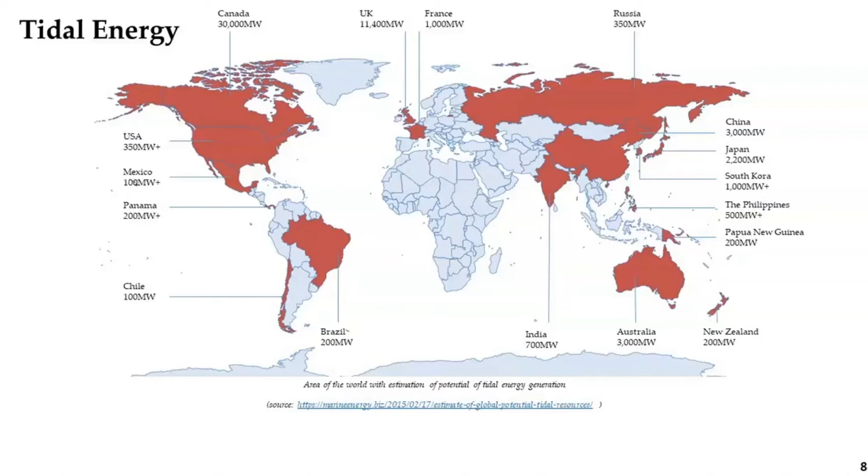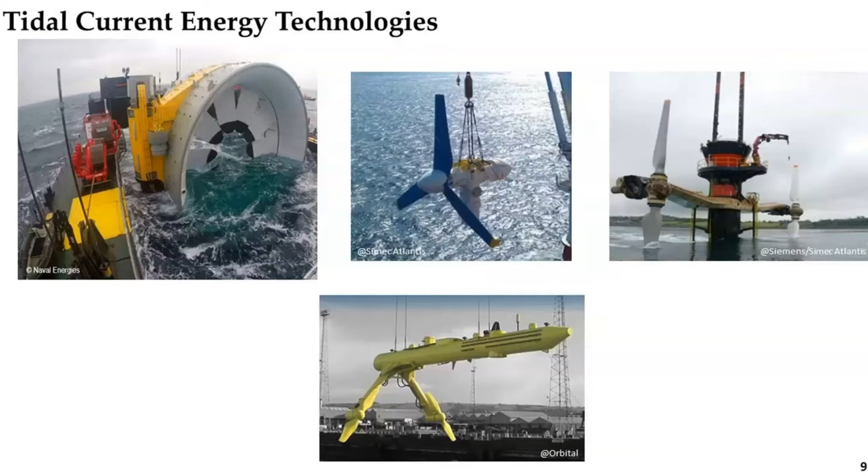There are several projects which are already grid connected with seabed mounted turbines, all in Europe. I'm going to present three projects. The first one is the MeyGen tidal project by the company SIMEC Atlantis, and it's happening in Scotland. They use a turbine with an 18 metre diameter rotor. Each turbine is located on an individual foundation weighing about 200 tons, and also with six ballast blocks with 200 tons as well to provide horizontal stability. In this area, the current speed is about 4.4 meters per second.

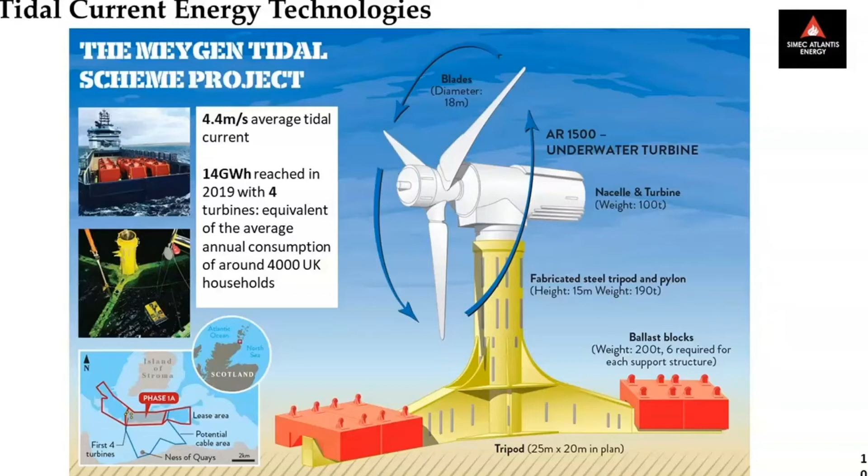And last year, with only four turbines, they reached 14 gigawatt hours, which is the equivalent of the average annual consumption of around 4,000 UK households. And this year, to date, they reached 28 gigawatt hours, and it's just the first phase with four turbines. In the future, they hope to deploy 250 turbines in the ocean that could power about 175,000 homes in the UK. And the latest news for this company is they have also installed one of their turbines in China just in April this year.

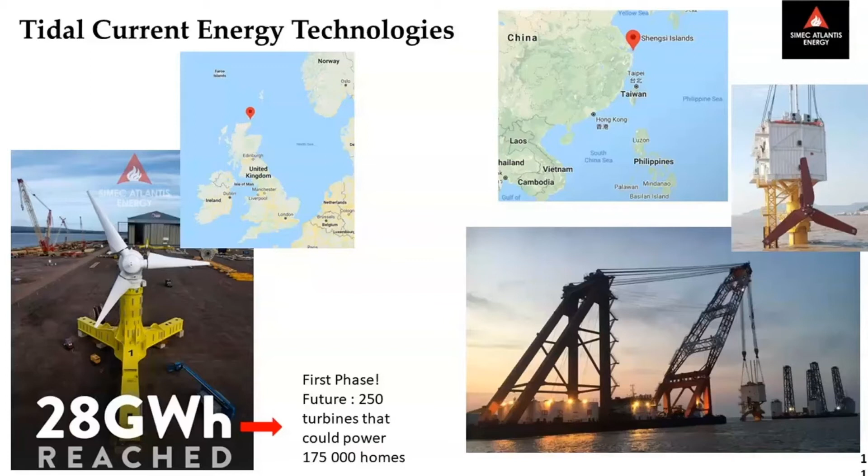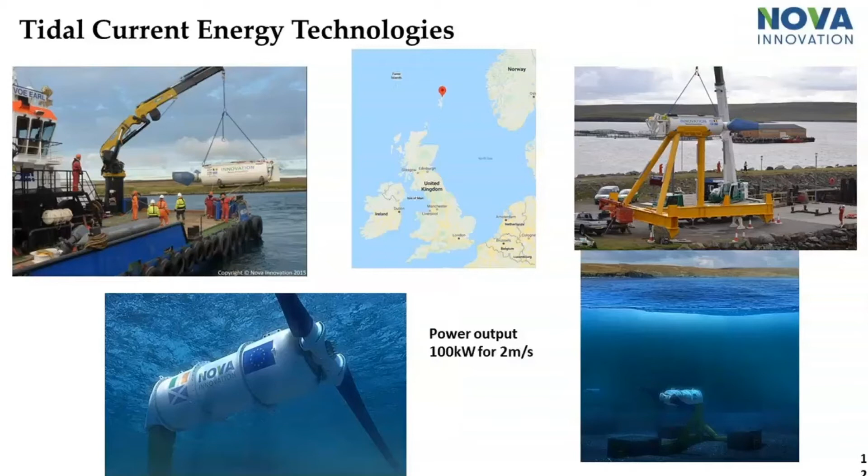The second company is Nova Innovation with a smaller turbine, and the project is happening in the UK too, in the Shetlands. It's a smaller turbine of 8.5 meters diameter with a rated capacity of 100 kilowatts for a current speed of 2 meters per second. The last project is happening in France with the company Sabella, located near Ushant Island, and they deployed a turbine with 10 meters diameter and a maximum power output of 1 megawatt for a current speed of 4 meters per second.

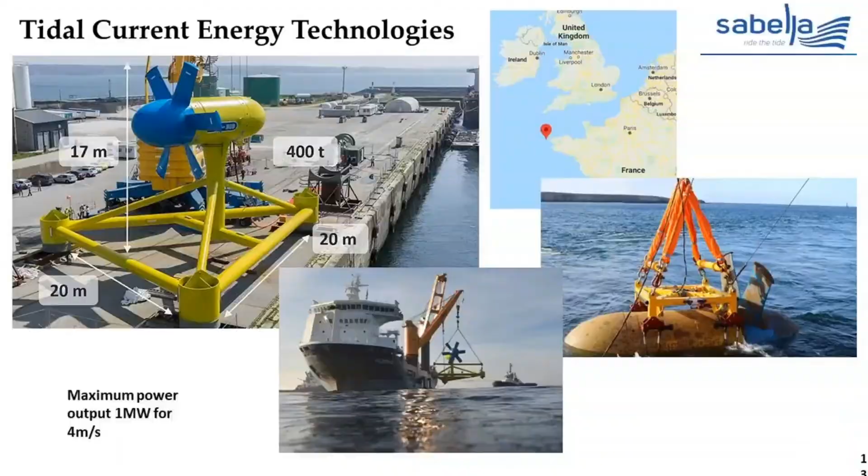So the tidal energy industry is very active in Europe, and it's coming to Australia. According to a preliminary study from CSIRO, there exist promising areas where tidal installations are possible. It's, let me see if I can.

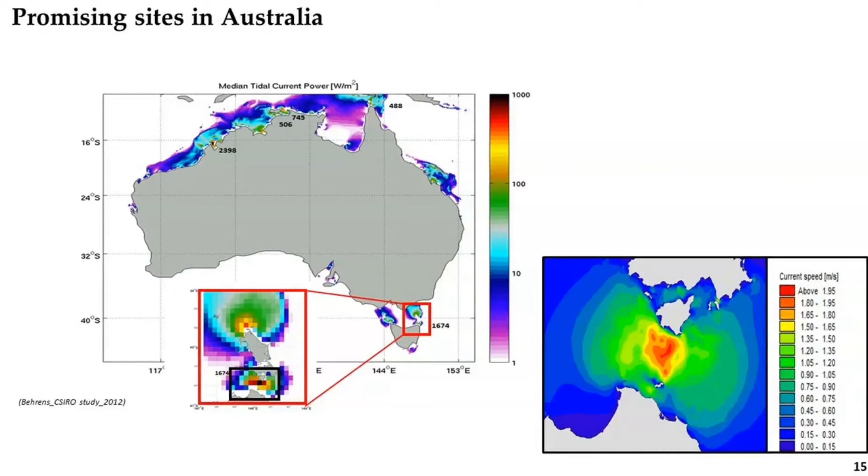It's in Western Australia with King Sound, around Darwin in the Clarence Strait, in the Torres Strait, and in Tasmania with the Banks Strait. The AUSTEn project, Tidal Energy in Australia, is a project co-funded by ARENA, and has also identified Banks Strait and the Clarence Strait as promising sites for tidal energy.

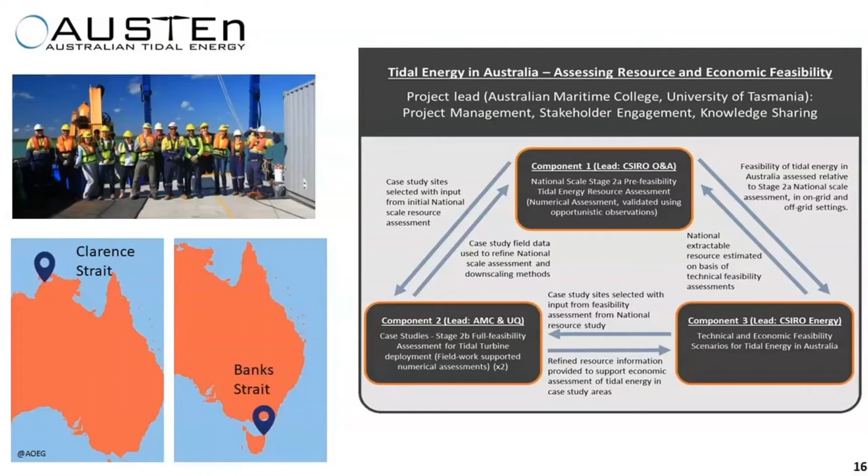The goal of this project is to map tidal energy resources and assess its economic feasibility. My project is part of the AUSTEn project and is focused on Banks Strait. People in the tidal industry are interested in this site, and they need to better understand all the characteristics in this environment, and one parameter is sediment transport.

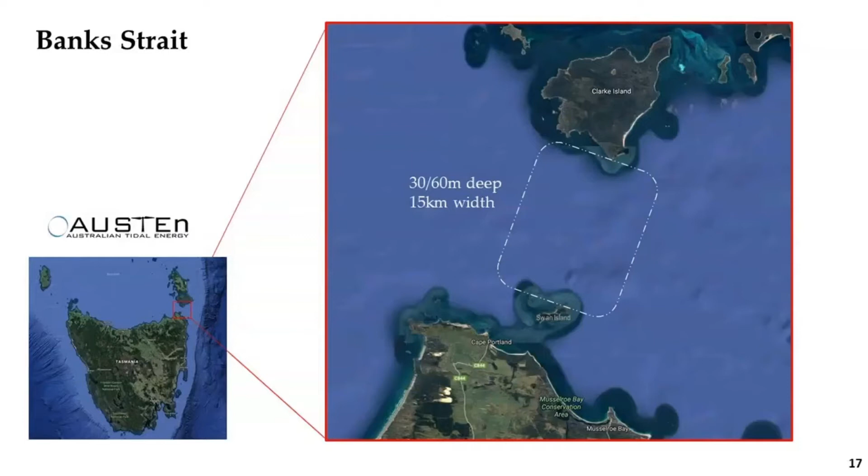So why is sediment transport important? Sediment in the ocean can be moved by currents, by waves, and very often by both. Sediment is set in motion when lift and drag forces are greater than gravitational and friction forces. Once the particles are in motion, two modes of transport are distinguished.

The first one is the bed load transport, so the mobile load close to the seabed in almost continuous contact with the seafloor. And the second one, the suspended load transport, the load that is no longer in contact with the seafloor due to turbulent flow higher in the water column.

Friction between the near seabed currents and the seafloor creates a layer of shear, increasing the turbulence above the seabed. It's the bottom boundary layer. This is the layer where the flow is the most influenced by the seafloor. The effect of currents and waves on the sediment dynamics takes place in this layer, and the friction they exert on the seafloor is expressed with the bed shear stress.

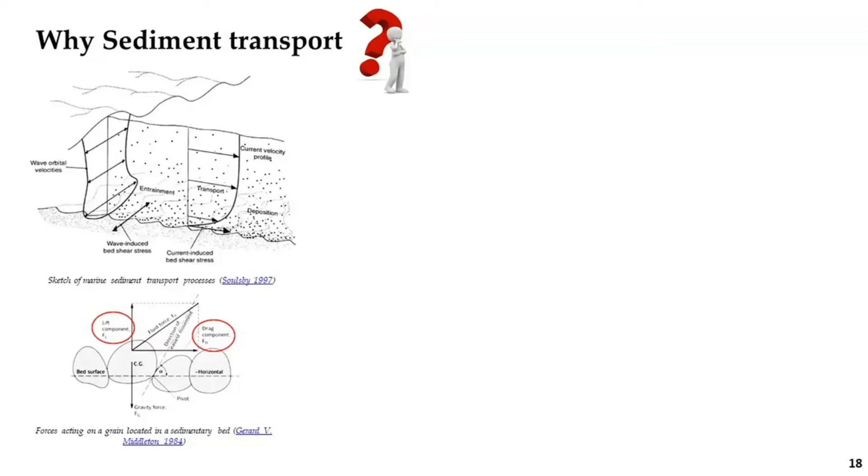The bed shear stress is a principal parameter acting on sediment dynamics and is a function of the square of velocity. The transport of sediment is proportional to an even higher power of velocity. So the total load, which is composed of the bed load and suspended load, is a function of velocity to the power 3 or 4. So small changes in current speed could lead to large changes in sediment dynamics. And sediment plays a crucial role in coastal ecosystems.

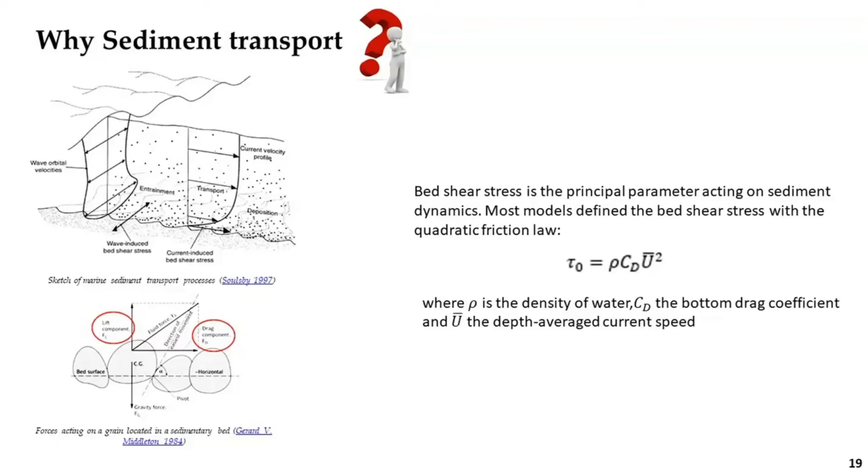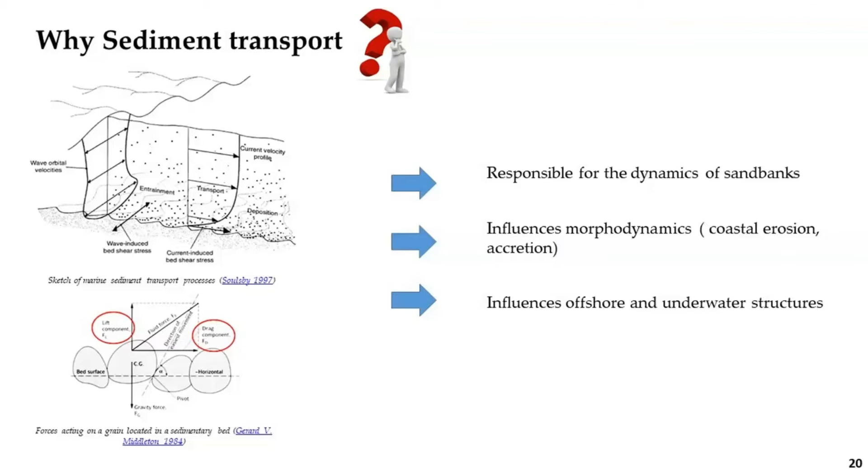Sediment movements are responsible for the dynamics of sandbanks. Sediment influences morphodynamics, and sediment movement influences offshore and underwater structures. Placement of tidal turbines in the ocean would increase the flow near the seabed and intensify the friction of sediment. The development of marine renewable energy pushes the scientific community to better understand this natural phenomenon and the interaction with the device.

Tidal energy is a clean technology and will help reduce reliance on fossil fuels. But it still faces challenges. Which ones? The first one is the uncertainty about interaction with the environment, like sediment transport. Sediment dynamics have an important implication for local fauna as well as turbine foundation and longevity.

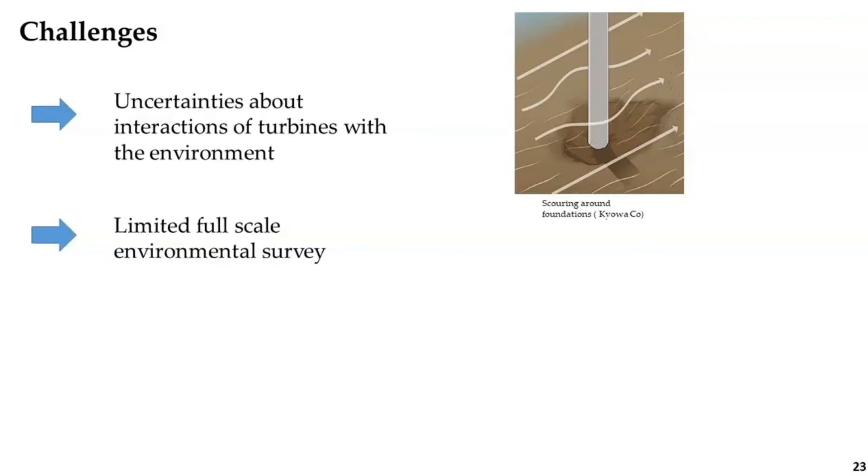The second one is the limited full-scale environmental survey, as it is at an early stage of development. We've seen earlier there are just a few projects advanced enough to be grid connected. The third one is the difficulty to acquire data, especially sediment data, to calibrate and validate the numerical model in this high energy site. And you can notice why: it's pretty rough conditions over there.

So this picture was taken during our first trip in March 2018 in Banks Strait. It was a 17-day trip, and the sea was like this during 3 or 4 days, so it was pretty rough, and I was sick during almost half of the trip.

So regulators in the tidal industry are particularly sensitive to the potential influence tidal energy converters could have on the marine environment. And little is known about regional scale fluctuation in sediment transport in tidal energy sites. Site-specific conditions are crucial for assessment, and for now, no specific study exists in Banks Strait.

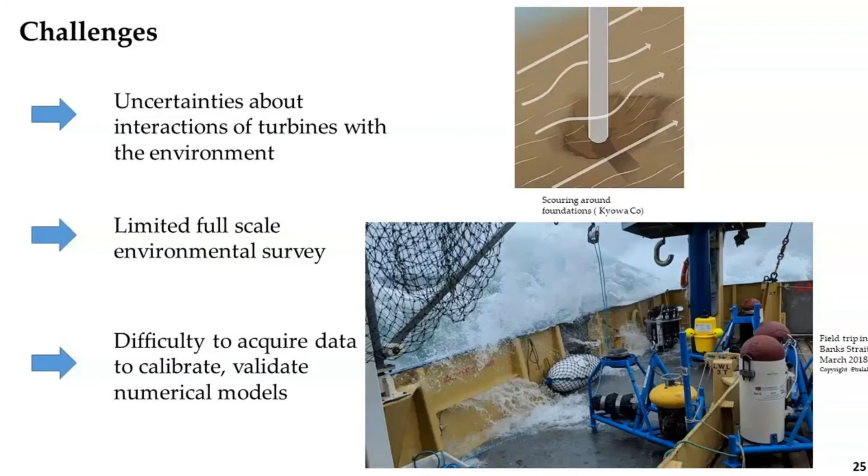So to address all these challenges, the objectives of my thesis are the following. Investigate the ability and sensitivity of sediment transport models in 2D and 3D to characterize high tidal energy sites. Explore sediment measurement methods to determine the best compromise between cost and time with model accuracy. Apply the model to study the hydrodynamics and sediment transport in Banks Strait.

And investigate the interaction between tidal energy converters and the sediment processes for various seabeds and for several array scenarios. The corresponding activities are the following. First is a literature review of the domain, the study of an idealised theoretical channel, the study of Banks Strait, and to finish, to define guidelines and methods for tidal energy developers.

So first, try to understand the numerical model in an idealised channel. I'm using MIKE 21 and MIKE 3, software from DHI, for all my simulations. So the tidal channel is in the middle. It's 30 kilometers, and it's connected to an open ocean and a tidal bay.

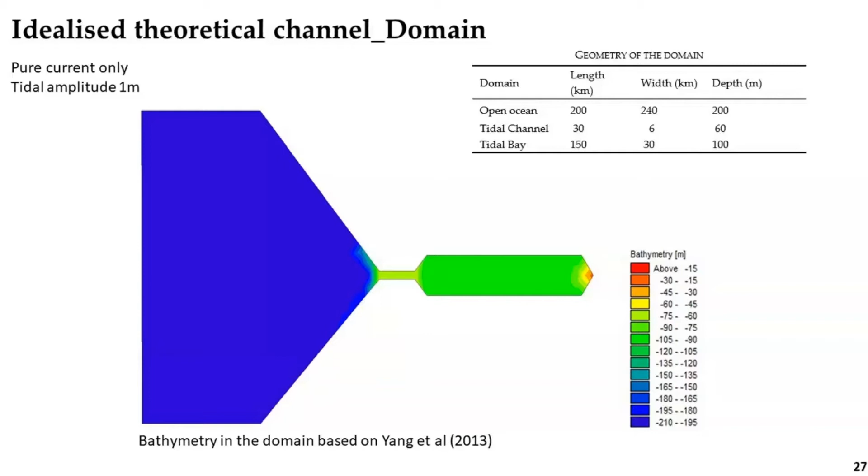Simulations were performed to quantify model ability and sensitivity, like the difference between 2D and 3D, the different sediment transport formulas, and different layouts of turbines. So for this project, it was just pure current only. So first, I evaluated the model against results from the literature. So I'm using another study from Yang, who used the MHK model.

So the difference can be explained by the discretization of the channel. I have 10,855 cells in my channel, compared to the MHK, which has only 1,140. So after the validation of this model, I tested different layouts of turbines, configurations with fences, and configuration of tidal farm. So A and B are fences, and C is a tidal farm.

I compare current speed and bed stress compared to the baseline. So the baseline is a case with no turbine. And the reduction in current speed is larger for the layout of tidal farm compared to the fences. For example, for the 500 turbines, we reach 6.5% against 11% in the tidal farm.

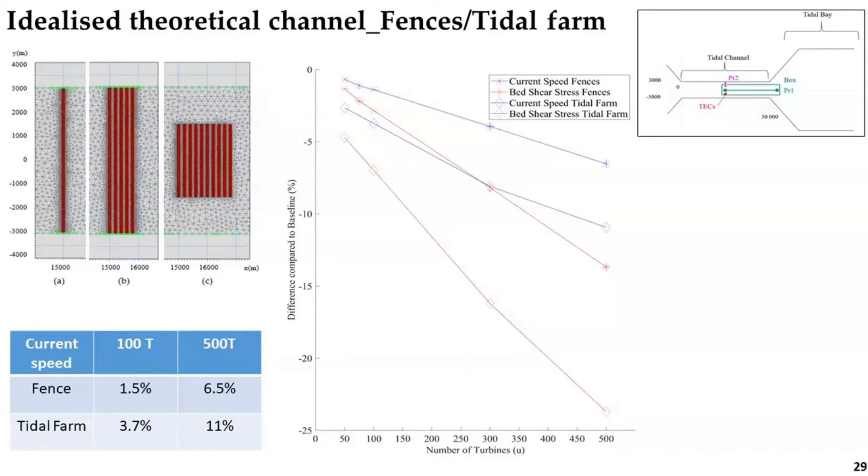So I took the case with most difference compared to the baseline, which is the 500 turbines in the tidal farm configuration, and I had a look at the bed level changes. So here you can see the difference of bed level change for 3 simulations. So for the 3D simulation, the mean velocity component used as an input for sediment transport rates can be calculated in 2 ways. We can use the depth average velocity, or the velocity can be derived from

the bottom stress value. So for the first two, the 2D and the 3D using the depth average velocity, there is not a lot of difference. The mean difference is about 4%. With the bottom stress value, it's another story. The comparison with 2D reveals an increase of 70 centimeters for the bed level change.

So the last model at the bottom captures more accurately the flow around the farm than the 2 other models. It captures the acceleration caused by the constriction of the flow near the seabed under the device. That's why a new zone of erosion, like the blue line, appears in the vicinity of the farm. So here we can see 3D is a powerful tool to have accurate results on the change of sediment dynamics at the location of the tidal farm.

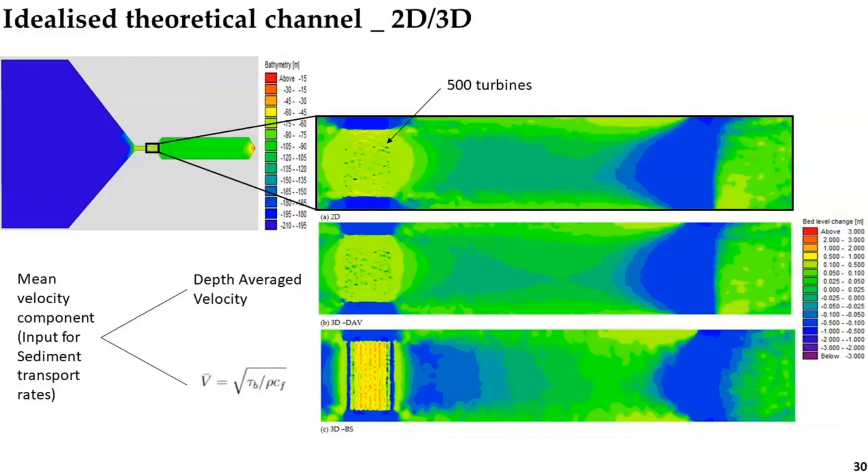But what about regional scale? To answer this question, I created another domain with a tidal channel twice as long as the first one, and it's 60 kilometers. You can notice there is not a huge difference between 2D and 3D far away from the tidal farm. At about 30 kilometers away from the tidal farm, the average difference between 2D and 3D is about 0.37 millimeters. This suggests that for regional scale, 2D seems sufficient. Moreover, 2D models were, in this case, 9 times faster than 3D.

So after looking at the spatial extent, I tested 2 different sediment transport formulas. It's a formula from Van Rijn and another formula, Engelund and Fredsøe. Engelund and Fredsøe generated the largest bed level change inside the tidal farm. I'm going to try to show you with the cursor. So here is the connection at the open ocean, here the tidal bay, and in the middle it's the tidal farm. So we have more precise detail in the 3D model. But yeah, Engelund and Fredsøe have the biggest change.

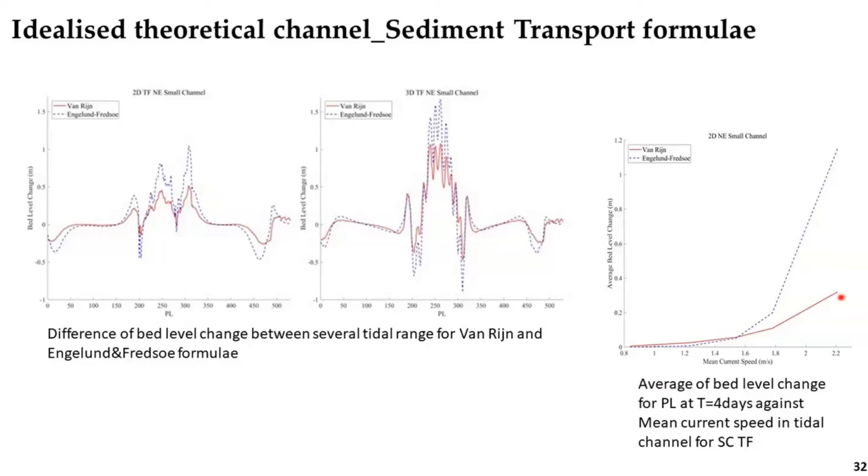So for this theoretical channel, I was able to create a benchmark for interaction of tidal energy converters on sediment transport. I've shown that MIKE 21 and 3 can be used for tidal energy extraction modeling. I've seen that beyond 100 turbines, the impact of tidal energy converter arrays becomes significant. We've seen that 2D models seem sufficient to assess behavior of sediment dynamics away from the tidal farm, but a 3D model using the bottom velocity for sediment transport rate is needed for more accurate results in the tidal farm.

And the last thing we discovered is that there is a difference of 1.9 between Engelund and Fredsøe and Van Rijn models. And Engelund and Fredsøe in non-equilibrium conditions was sensitive to change in current speed, suggesting small errors in this parameter could lead to significant error in bed level change. This illustrates also the degree of uncertainty in determining sediment transport rate.

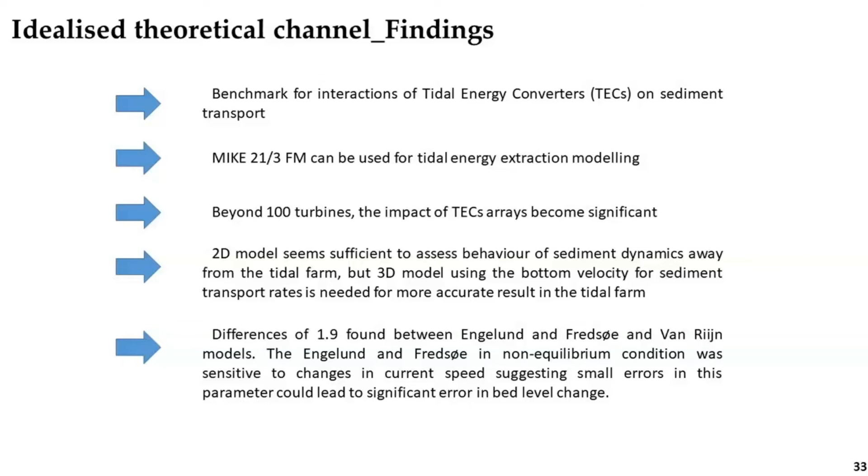So after the idealized theoretical channel, I move to the real site, Banks Strait, which is a little bit more exciting. To calibrate and validate the numerical model of Banks Strait, we need in situ data. So with the AUSTEn project, 4 field trips have been conducted in March, July, December 2018, and February 2019.

We use a large set of instruments. So the first one here is ADCP, Acoustic Doppler Current Profiler, to measure velocity, and some of them measure waves as well. In the middle with the rocket shape, it's a penetrometer used to test the strength of the seafloor. Then sediment traps I've designed with the help of the technician team to have information about the grain size distribution.

At the bottom here, it's an optical sensor with a laser which provides particle size distribution. In the middle here, the sub-bottom profiler to characterize the seabed. And the last one is a grab sampler to have particle size distribution.

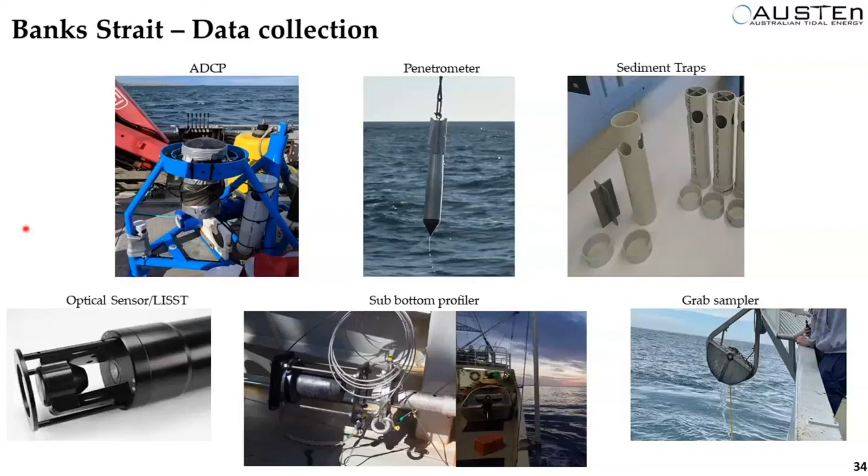We also surveyed the area with a multi-beam. Here you can see a little scheme. To have precise bathymetry in this site. It's very important as an input for the numerical model. And very interesting features were noticed near Clarke Island. Here it's tidal sand dunes, with a maximum of 8 meters for the biggest one.

Here are also represented all the locations of the different stations of ADCP. So the ADCPs are looking up for all of them, except just for one. It's the box frame here. So here it's an ADCP which is looking down to have more insight about the bottom velocity, which is important for the sediment transport rates.

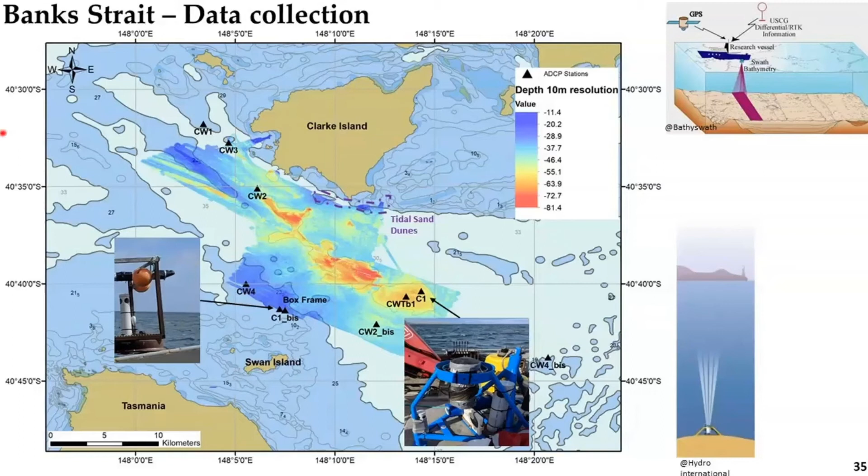With the grab sampler, the sediment traps, and the penetrometer, I've been able to characterize the seabed of Banks Strait. So except near Swan Island here, where it's medium sand, we found in the strait it's more coarse sand around Clarke Island here, and rocky area in the middle of the strait. So this is the part of the characterization of the seabed to be an input for the numerical model.

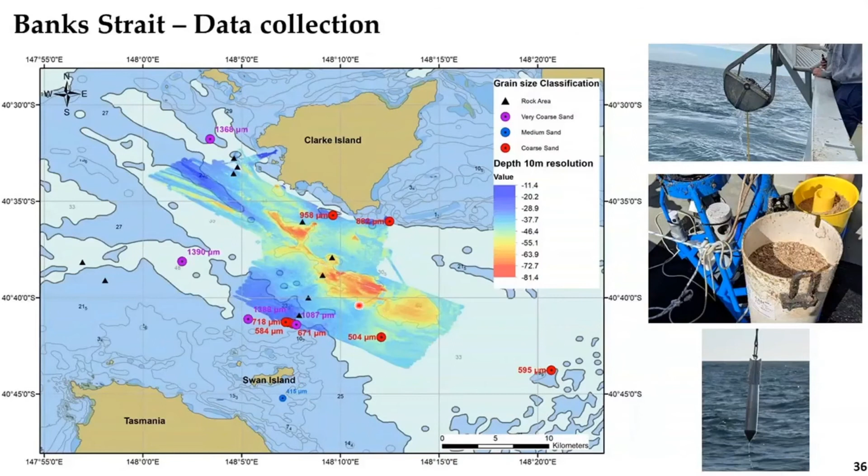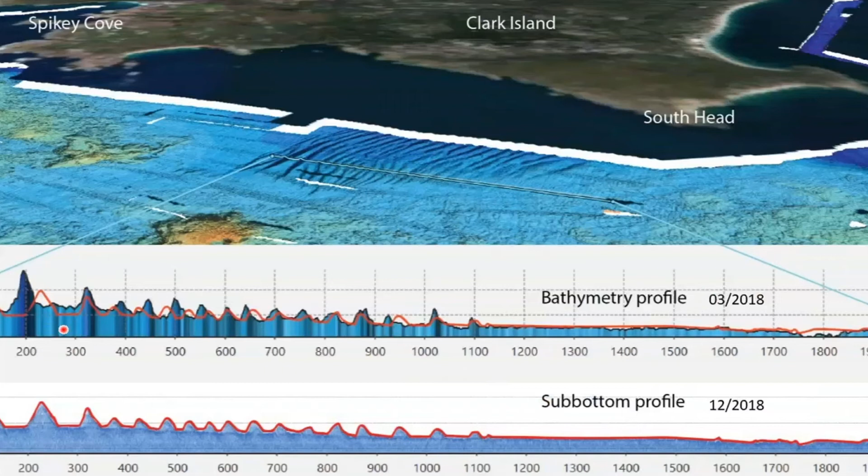So the sub-bottom survey was compared to the multi-beam survey. The sub-bottom survey was in December 2018, and the multi-beam was performed in March. So we overlap the two profiles, and you can see the dunes are moving. There is a migration, which is clearly seen here. So we need to understand how a tidal farm could influence this migration. So all these data are used to calibrate and validate the numerical model.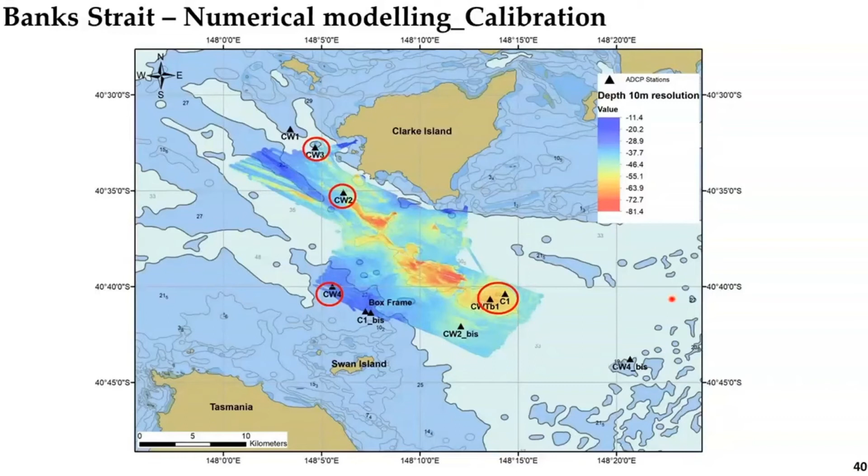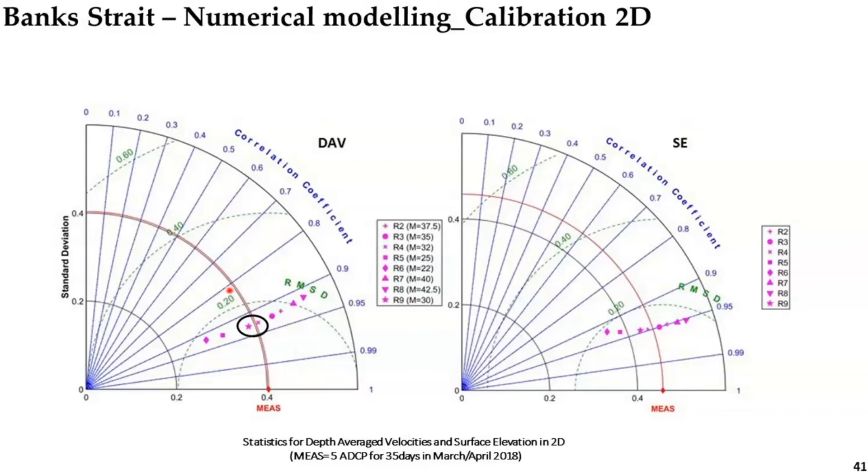Comparison between model results and ADCP was quantified using the Taylor diagram, which uses the combination of 3 statistics: the standard deviation, the correlation coefficient, and the root mean square deviation. So here is the comparison for the surface elevation, and here the depth-averaged velocity. For the surface elevation, run 4 is the best, and for the depth-averaged velocity, it's R9 and R4. So we just selected these two, and we compared them in 3D.

For the depth-averaged velocity and for the hub height layer. The hub height layer is where the rotor is located in the water column when we add turbines. We have also here at the bottom a time series at the hub height. In black is the ADCP, and in blue the results for the 2 runs. So run 4 was the closest to the in-situ data and was selected to represent the best condition in Banks Strait.

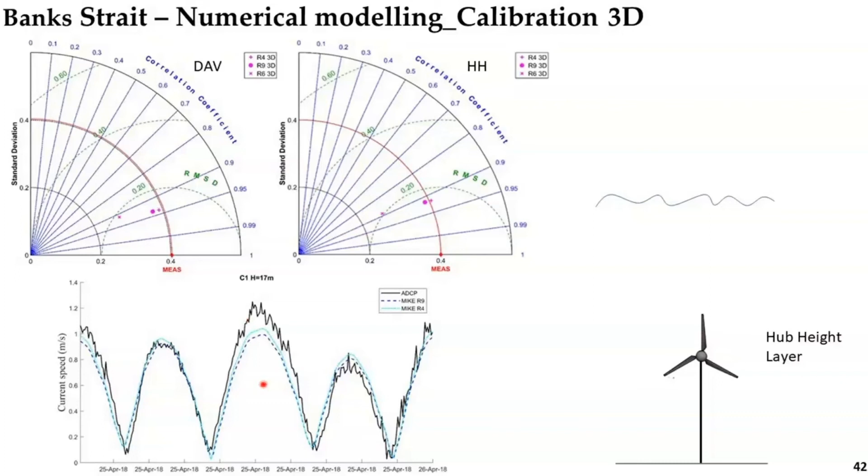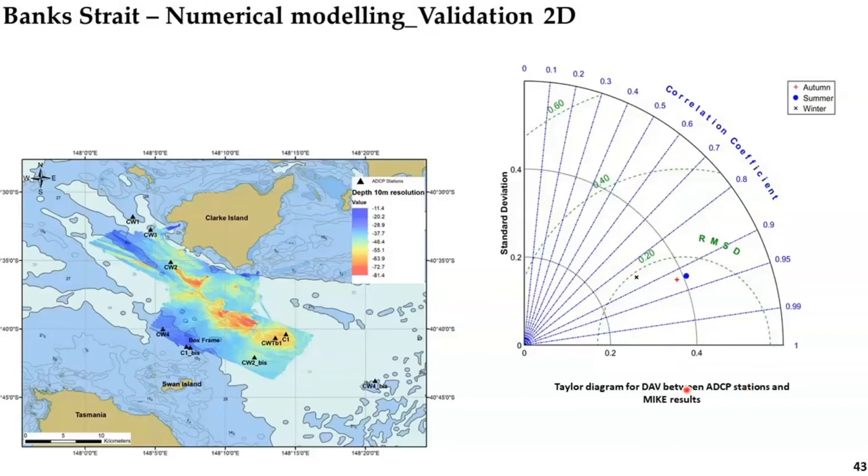So after we calibrated this simulation, it was run for 1 year and validated against measurements for 3 different periods from March 2018 to February 2019, and we used all the ADCPs at different periods. And we also used the Taylor diagram. All periods show good agreement with slightly lower results for winter. We analyzed some wave data for this period, and there is stronger activity in winter, which explains the difference because my model doesn't have wave forcing for now.

Then I added a tidal turbine in the model. It's 20 meters rotor diameter, and I tested 2 tidal farms, one with 100 and a second one with 300 turbines. So here is the change in the depth average velocity between the baseline and the tidal farm scenario.

So for the 100 turbine scenario, the spatial extent does not go beyond 5 kilometers. It's more about 2 kilometers, the same in 3D. For the 300, it's more about 7 kilometers in this direction, and it's the same for the 3D. The difference between 2D and 3D is not significant for depth average velocity.

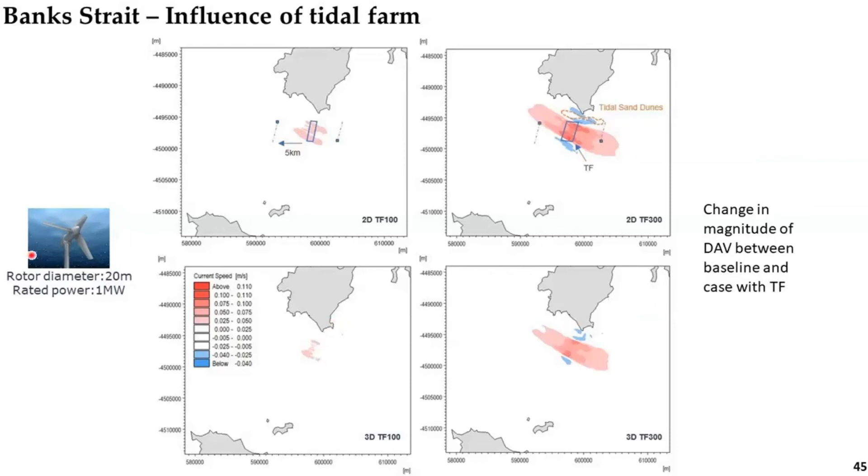When I had a look at the 3D model, the biggest change in the water column was at the hub height. So here it's the location of the turbine for the farm of 100 turbines, and the same here. It's the location where there is the most reduction in the current speed.

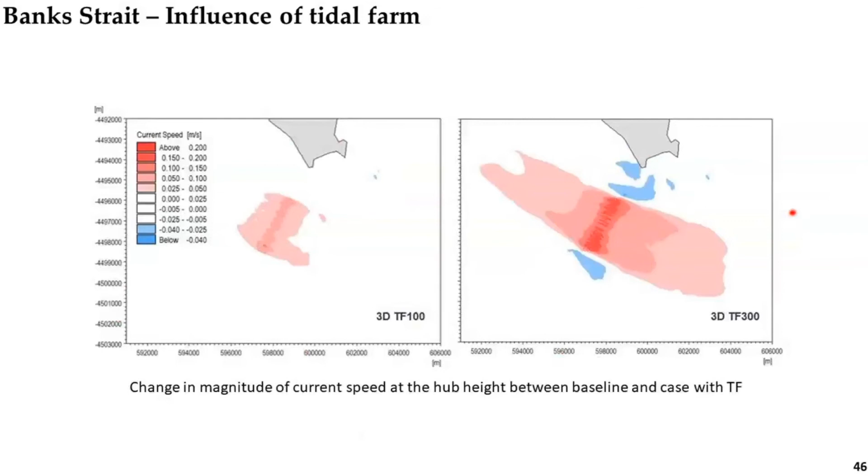I extracted some velocity profiles to see the difference between the two resolutions, 3D and 2D. So the difference is most significant at the location of the tidal farm. Here you can see there is a decrease in the flow. So in the 3D model, the decrease of the flow due to energy extraction is well represented in the water column. And far away, so 1 kilometer, 5 and 18 kilometers from the tidal farm, the difference between the two resolutions is not very significant. So this is for the current speed.

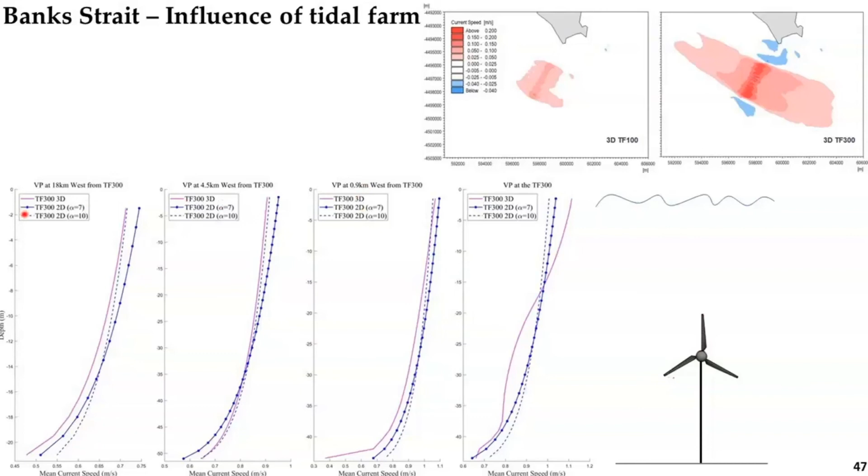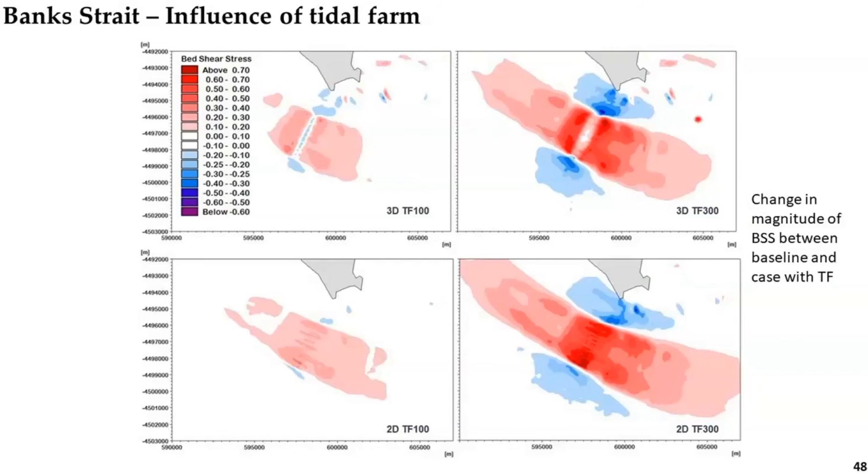So to pursue the environmental impact assessment, the focus needs to be on sediment dynamics, to quantify the migration of sand dunes and see the influence of a tidal farm on it. This is my work at this moment, and I'm just implementing the numerical model with WAVE, and I'm trying to reproduce what we've seen from the sub-bottom profile compared to the multi-beam.

I try in 2D because we have seen that between 2D and 3D there is not a lot of difference. I'm trying in 2D to run a model for 9 months and to reproduce the migration of the dunes. And after I will implement a tidal farm and determine what will be the influence on it. So this is the next step for the next couple of months.